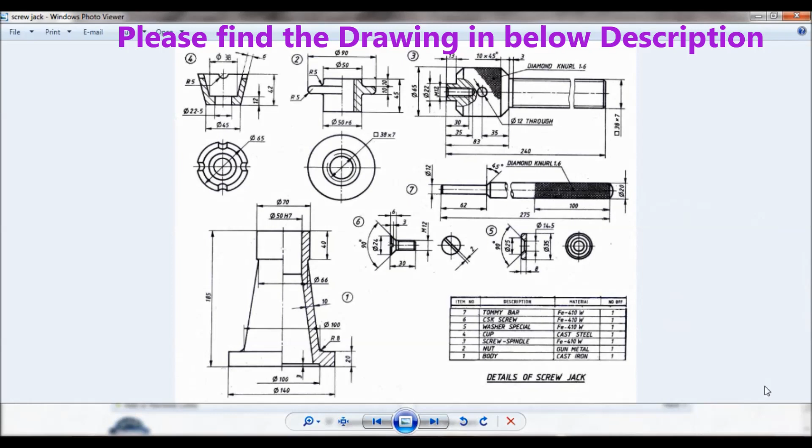So you can see the detail of screw jack. So now let us do item number 1, that is the body, made up of cast iron. So you can note down this drawing. You'll find the drawing in the description below.

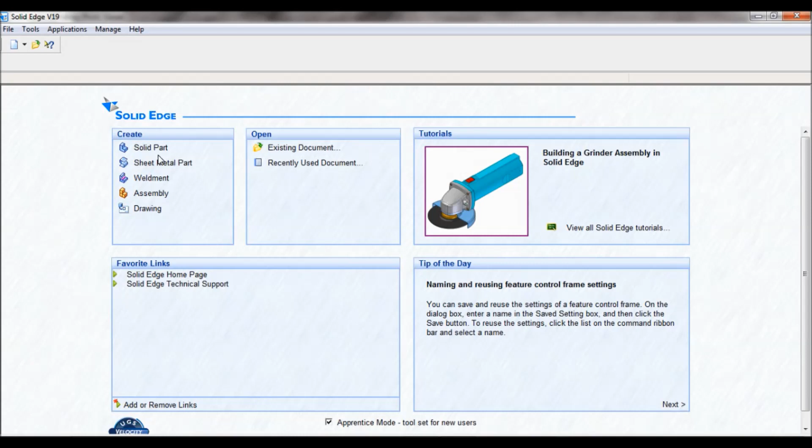So let us begin. Go to Solid Edge, click on solid part, go to named views, set as ISO. We will do it using a revolved protrusion. So select revolved protrusion, select front reference plane.

Using line command, I'll draw the profile. So I'll be drawing the profile like this. Make sure this is equal. So I'll put the relation, equal. So this one is equal to this.

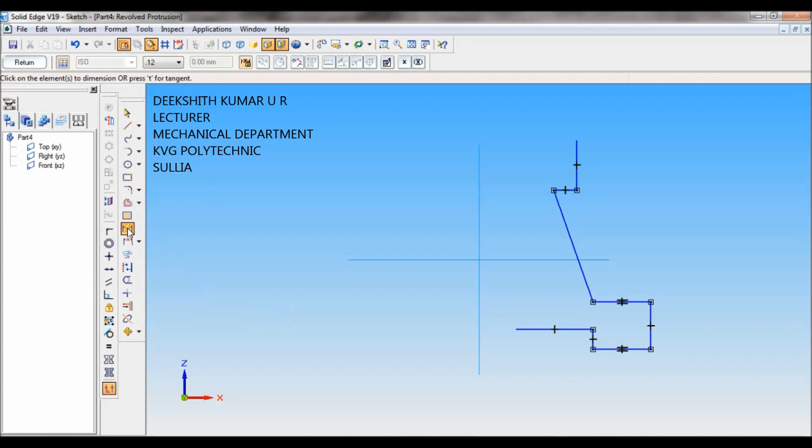Now using smart dimension, I will fix all the dimensions. Please note that I'll be going stepwise. So first, number 1 dimension will be this one. This is 3 mm, enter. Next, number 2, that will be 20 mm.

Next, number 3 is the outer diameter. From here to here it is 140. So let us make it 140 divided by 2, enter. Next, the fourth one, from here to here, it is 100 diameter, so 100 divided by 2, enter. Next is fifth, this height, that is 40 mm.

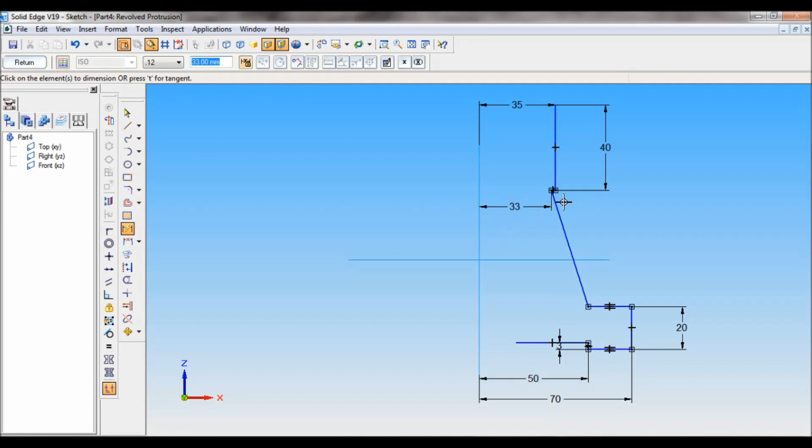Next, this diameter will become the sixth dimension, that is 70 by 2. Next, the seventh one, from here to here, that will become 66 divided by 2. I hope you understood this.

The last one is the height. From the base to the top, this length is 185 mm, enter. Just click on fit. So this is the outer profile. Now I'll be using offset. The offset distance will be 10 mm.

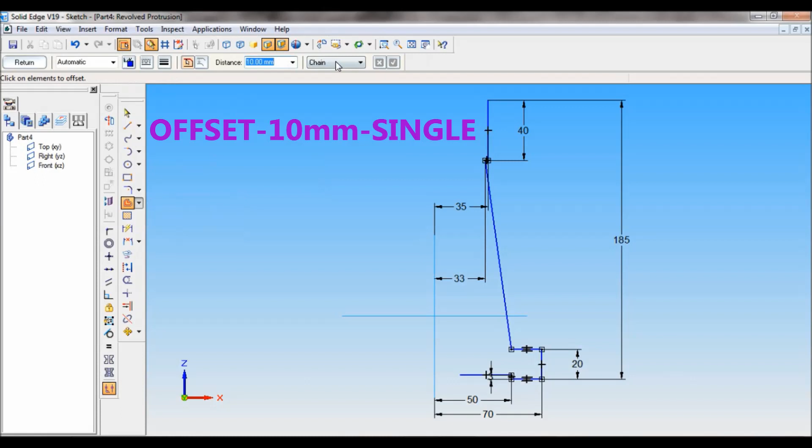I'll make it single. I'll select this line, left click, right click, left click, and you have to end with the right click. Similarly, select this line, left click, right click, left click, and right click.

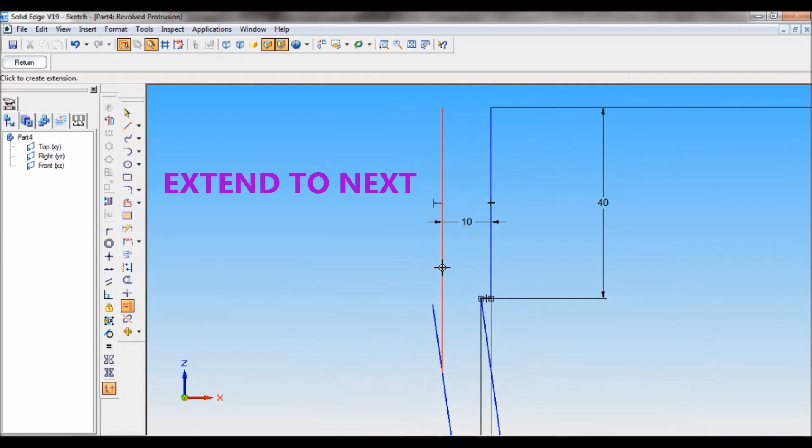Next, I'll be using extend to next. I'll zoom this area. So this line is extended to the next. Click on fit, and this also has to be extended. Use extend to next. So this will become the extension.

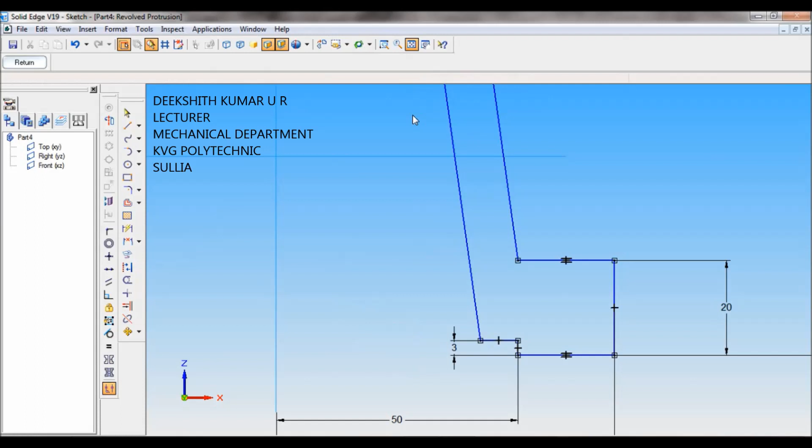Now using trim, I will trim off this extra line. So this line I will be trimming. Next, this line I'll just trim off. Click on fit. I'll zoom this area. Using line, I'll close the profile. Right click and fit. So this will become the outer profile.

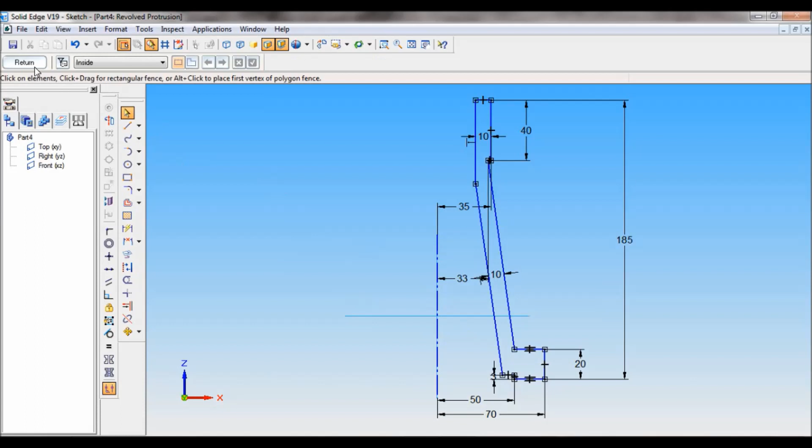I have to select the axis of revolution. Select this and make it the axis of revolution. Now click on return. The angle is 360. Click here, 360. Fit, finish, cancel.

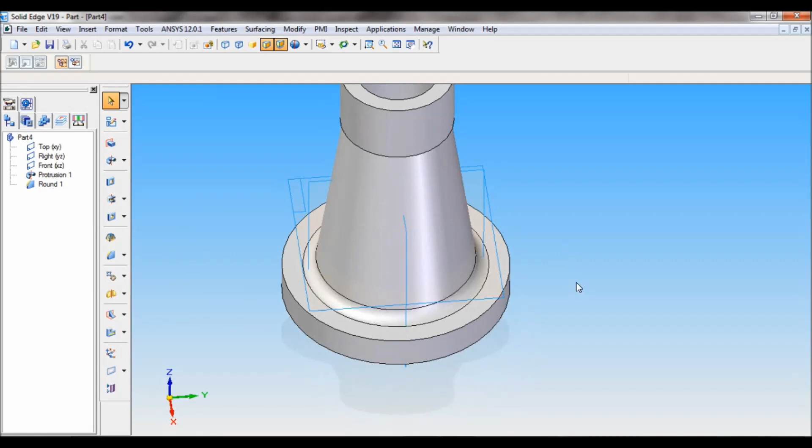Now I'll be selecting round. I'll set it as 8 mm, enter. Select this edge, click here, accept, preview, finish, cancel. So the body is complete. You can see here. I'll set as ISO and fit.

Go to tools, material table, and the material given is cast iron. I'll type cast iron and apply to model. I'll click on save. Summary, the title will be body. I will copy this, click on OK.

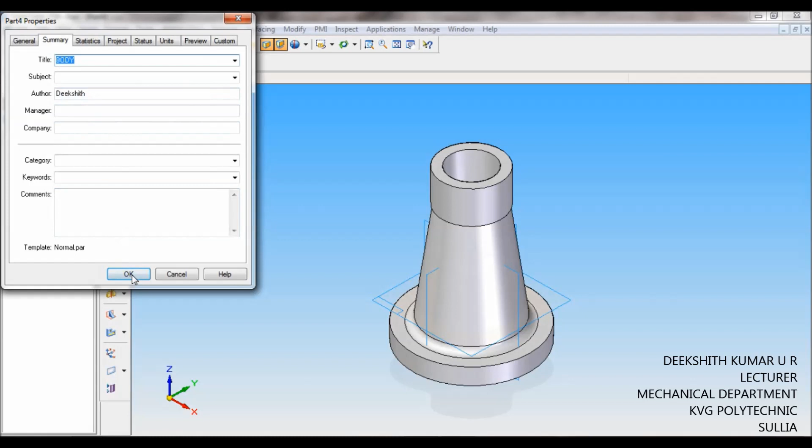I'll create a new folder with the name screw jack. OK. Under screw jack, the file name will be body. Click on save. That's it. We have completed the body.